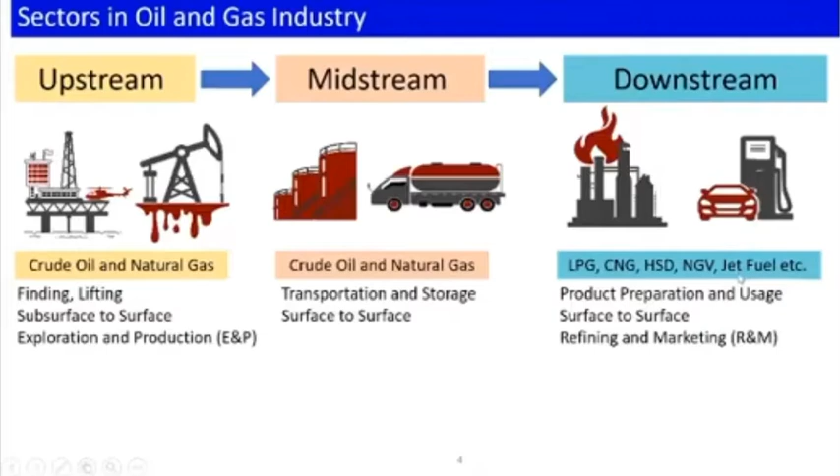When we talk about the upstream, we are talking about crude oil and natural gas only. Similarly, in midstream we talk about crude oil and natural gas. However, in downstream, we have various other useful forms and byproducts obtained from crude oil and natural gas.

There is a very important classification involved in this industry, called zone. We have to classify the environment where these industries are installed, or anything related to this, based on the risk level.

The thing is, with this industry we have a risk called explosion. We know there are three parameters that basically drive this explosion to occur. The first thing is we need a flammable substance. That is the necessity requirement for something to explode. This is the first requirement.

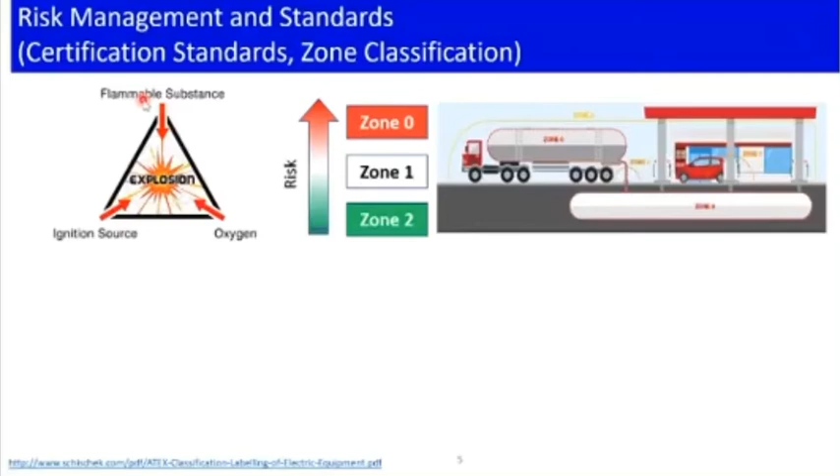A flammable substance could be crude oil, petrol, diesel, gas, anything. Second, even if you have a flammable substance, you need something to ignite it. If you have these two things and want an explosion to occur, then oxygen must be needed.

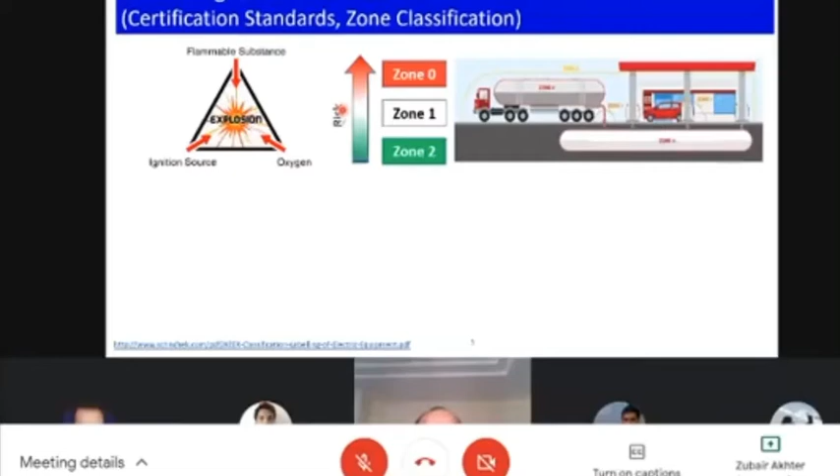However, in our operations we always have this kind of availability of flammable substances, so we give most priority to this element, whether it's flammable liquid or flammable gas. So when we talk about risk, we talk about zone 0, meaning the highest risk of explosion. The second thing is zone 1, which comes after zone 0. And then zone 2 is considered a safe region.

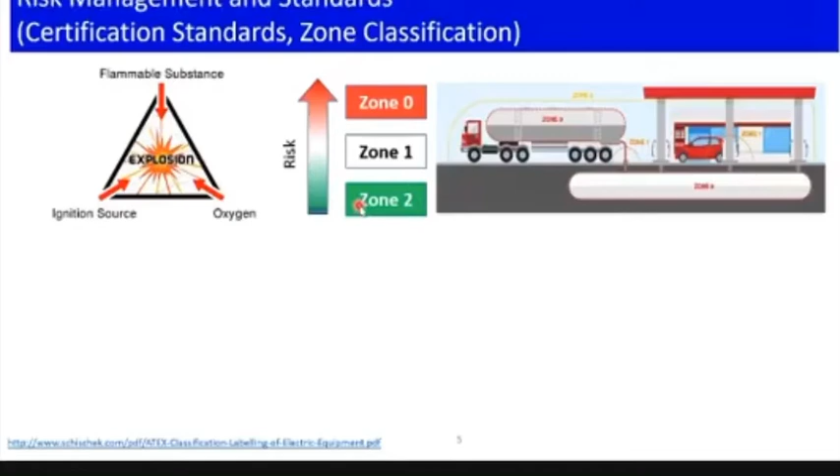Similarly, if we see an example of a petrol pump, we have a feeder tank. The whole tank and the region inside is considered zone 0 because we have a flammable substance inside it. Similarly, we have another tank which is a storage tank of a petrol pump — the whole tank is considered a zone 0.

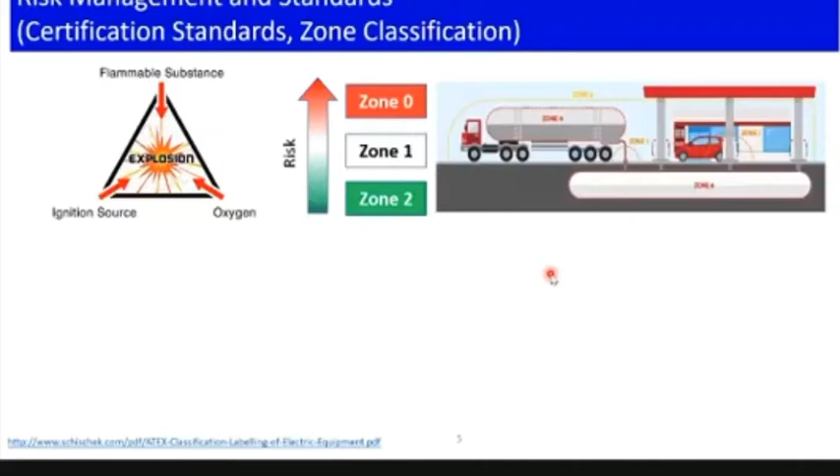Similarly, the areas where we operate and use these kinds of flammable substances, there are various operations involved where zone 1 and zone 2 are basically interacting. So we need to classify these zones separately — which is zone 1, and zone 2 is slightly farther away from zone 1. So we have a kind of criteria for explaining these zones.

For zone 0, we have explosive atmosphere continuously for a long period, or frequently occurring. So these are the continuous and frequent conditions — that's how we can define these as zone 0.

Similarly, in zone 1, we have an atmosphere likely to have an occasion — an explosive atmosphere which is likely to occur, like during the operation of distributing petrol, maybe we can have a spill of petrol. So the presence of those explosive substances in that environment, if they are likely to happen, means we can assign that zone as zone 1.

And then there is another zone called zone 2, which is basically far from a certain radius, and it depends on which stream you are talking about. There are various standard agencies who basically decide the criteria between zone 1 and zone 2.

So there are various certification standards we are talking about, such as ATEX and IECEx. These are international standards that decide — if you are working in this industry, you have to take the approval or certification from these bodies, and they will classify for you which is zone 0. Although there is no debate on zone 0, zone 1 and zone 2 are debated, like how much radius and how much space you have to keep aside. So these are the standard agencies.

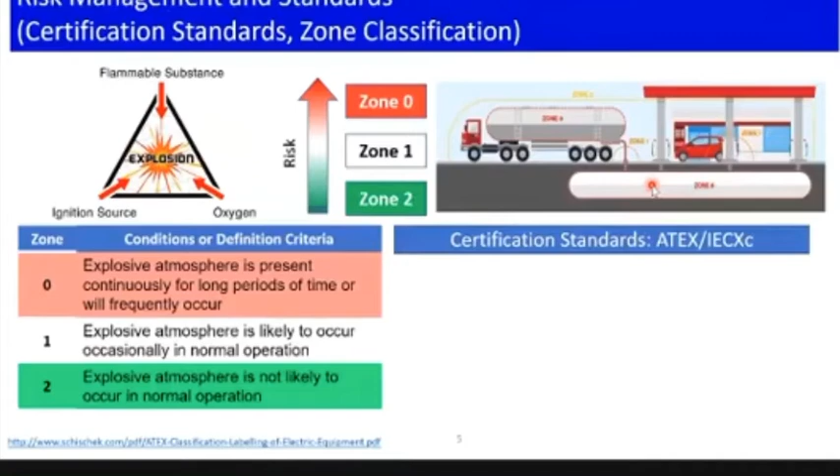They look for the site and decide which zone is basically in which region. Similarly, if you want to design any electronics or solution for this industry, you need to have a certification from these industries.

This certification comes with some sort of code. For example, I'm trying to say here what are the things very important for them, and they are basically certifying those things.

The first thing, CE stands for certified. So if you have anything installed in this industry as an object, a label should be printed on it saying this is certified in this scenario. These four digit numeric numbers basically tell us which lab of this international association is involved in getting the certification.

Similarly, if we see a symbol like this, with EX in it, and we have an enclosure, that means your device is basically an explosion safe enclosure. If we didn't have an enclosure like this, that means it's not safe for explosion.

Second thing, product group and product category. In product category, we have one which says this product belongs to and is used in the region of zone 1 for gas substances, like in the gas environment. If you have oil, then you need to put a certain other code for oil. If you have a dust environment, then you need to put a dust environment code. So there are various codes to be used in place of G.

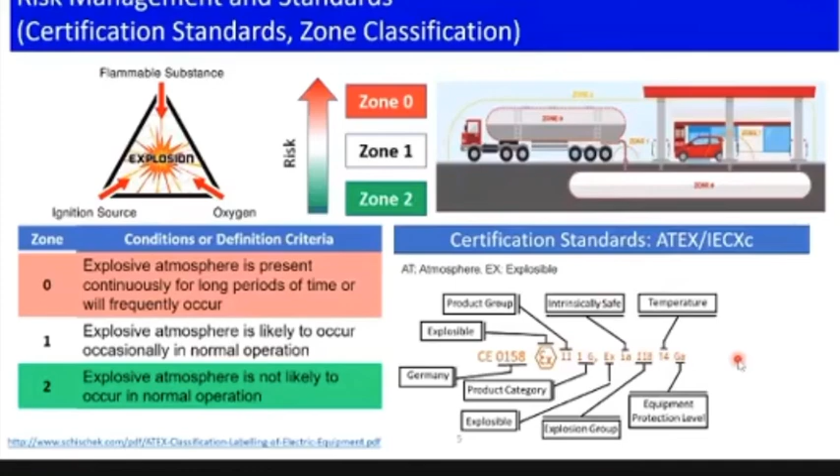So we are talking about microwave sensing. We have talked about the oil and gas industry overall. Now we need to learn about how microwave sensing is basically used in this industry.

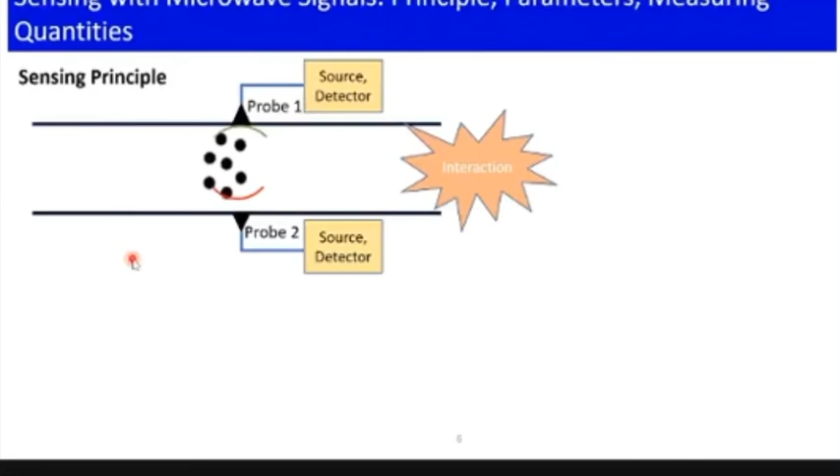If this media is flowing inside this pipeline, we need to excite this pipeline with the RF and microwave signal. Because of the interaction between the flowing fluid and the microwave signal, we have some sort of scattering, and that scattering is detected and measured by this setup, this detector we've used here, these probes.

During this interaction, some part of the energy is reflected, and some part is transmitted through the second probe. In microwave energy, we talk about scattering parameters, so we usually measure the reflection coefficient and transmission coefficient. These parameters and measuring quantities could be magnitude, phase, or sometimes resonance frequency if these probes are resonant probes.

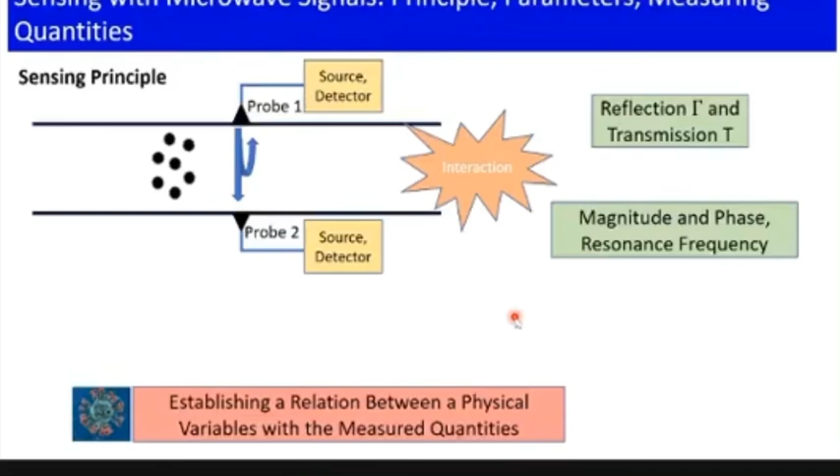The principle is very basic here, but the most important and complex thing is identifying and establishing a relationship between the physical flowing medium and its properties with the measured quantities - magnitude, phase, or resonance frequency of the reflection and transmission coefficient. This is the most important and challenging task in this industry, and it varies with application. We'll discuss some scenarios about this interaction and the modeling of this.